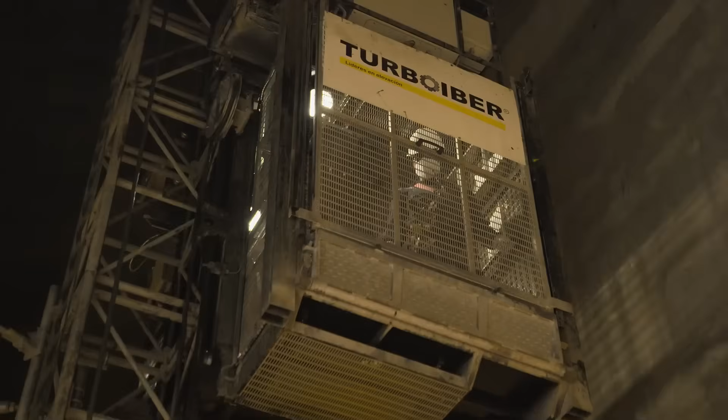Here we are on top of the tower, 220 meters high, and here you see the solar field with 10,600 mirrors, which aim the light of the sun to the top of the receiver, increasing the temperature to 560 degrees Celsius.

A global industrial revolution is underway. We have a technological challenge for our environment, for the well-being of the population of the planet, for civilization.

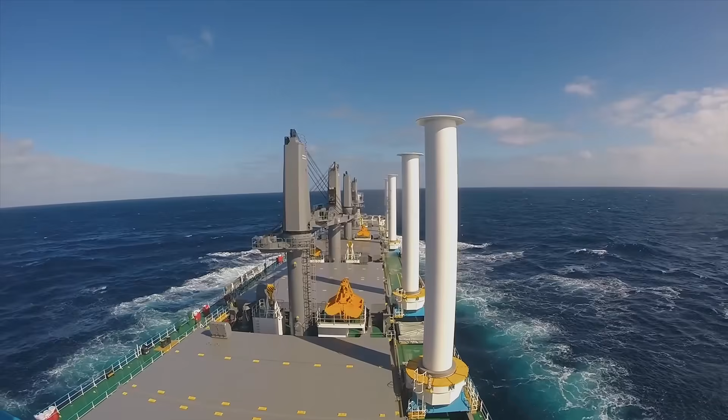Driven by passionate, dedicated individuals intent on shaping a new world. I do it because I look at my kids, and I honestly am convinced this is the way. A cleaner world - there is a way forward other than burning fossil fuels.

A greener world. This wind farm is producing more hours of power into the grid than all wind farms in the UK, and probably in the world.

What we've done in the past is not going to solve these challenges. We need to find new ways, and I think the only way to do that is to bravely step forward and implement technology. Together, they are pushing engineering to its limits to create extraordinary machines that can protect our planet for the future.

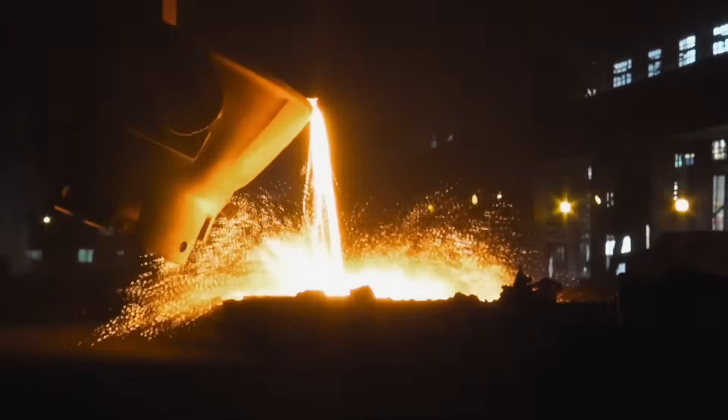We face one of the greatest challenges in the history of humanity: to eliminate the fuels that have driven progress and technology for over a century, while our thirst for energy only grows.

Could the solution lie with an ancient and distant power source? It's without question that in our solar system, the sun is the greatest source of energy, and the better we can take advantage of that, the better it is for us as a civilization.

It's like a nuclear reactor in the sky, and it provides endless power. If we can harvest just fractions of this, it can power all our consumption.

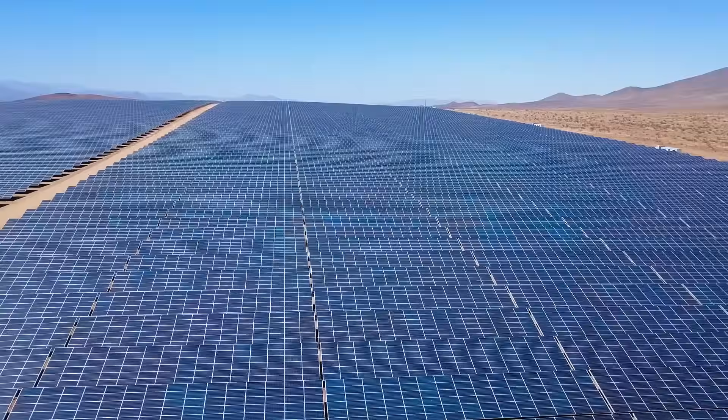Giant strides have been made in capturing the sun's energy, but to replace fossil fuels, solar power needs to step up a gear. We've got a long way to go.

The way I see it, we've only got 2% of the world's energy from solar. So there's a massive opportunity there, and this technology is made for it.

Engineers are racing to capture more of the sun's power, to open vast new expanses for solar panels, and even to make solar electricity available through the night.

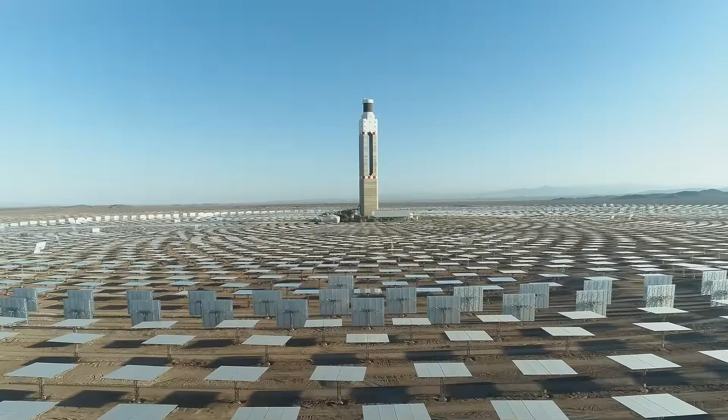This is the full cycle that allows us to keep generating 24 hours using 100% renewable energy, the light from the sun. This is the future.

The vast majority of solar power today is generated by silicon solar panels. These are made of many individual cells. Each cell has two thin layers of crystalline silicon, which have been altered so that one is slightly negatively charged while the other is positive.

The magic happens when light falls on it. Electrons in the silicon atoms absorb the energy and break free. The negatively charged electrons are then drawn toward the positive layer. Once connected to a circuit, this flow of electrons becomes electricity.

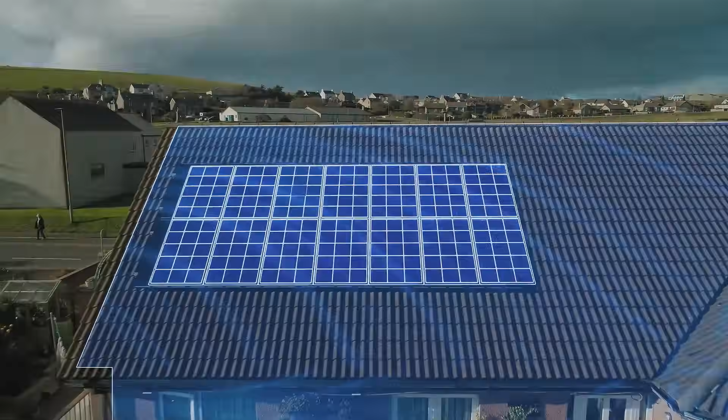Solar panels like this are on rooftops all over the world, producing clean, green electricity to power our homes and charge our gadgets.

But transportation is a much tougher challenge. It's still overwhelmingly powered by fossil fuels.

A tech startup in Holland has gone right back to the drawing board, inventing a new car from first principles that could revolutionize personal travel.

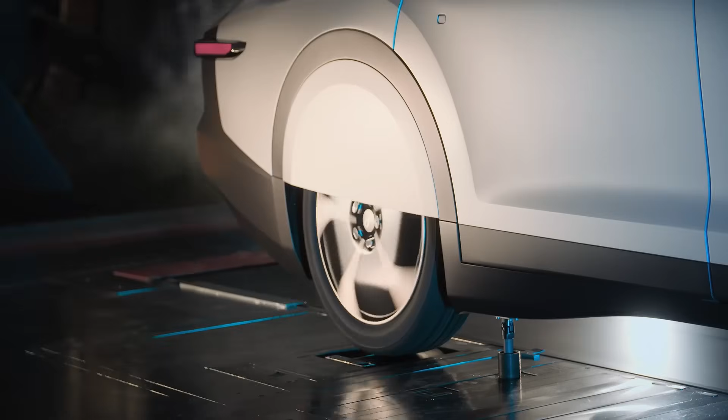Their goal is to prevent billions of people buying gas-powered cars by offering them a vehicle that charges itself for free. Everybody said we couldn't do it, and that's what makes it interesting. I think that's actually one of the things that motivates us, that it seems like an impossible challenge.

And actually, if we look back at the beginning, it all started with the World Solar Challenge.

Their story began at a race across Australia. Every two years, a fleet of futuristic vehicles can be seen streaking across the desert. This 1,800-mile race is powered by the sun, with cars built by students from around the world.

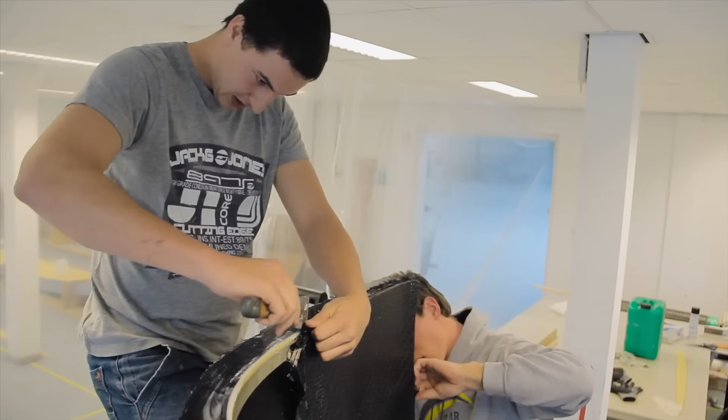In 2012, a Dutch team from Eindhoven, including electrical engineering student Arjo van der Ham, decided to enter for the first time. I think most people were there for the adventure and for actually building something with your own hands during your studies, seeing it work, and then trying to win the race in Australia.

In previous years, all entries had been one-seaters, built purely for speed. But that year, the team decided to enter a new category that awarded extra points for comfort and practicality. The idea was to encourage the development of a commercially viable solar-powered car.

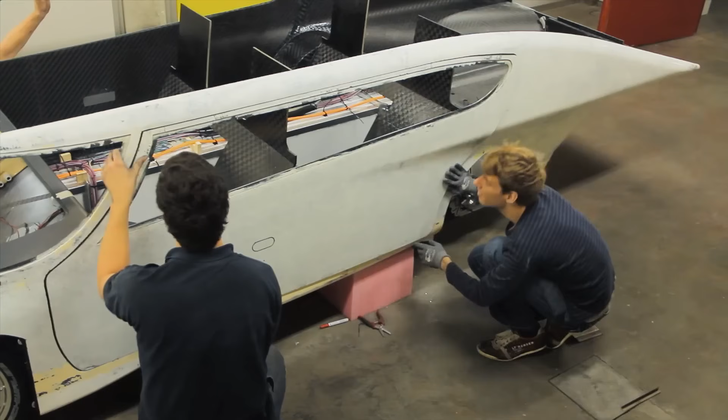We said, okay, let's build a four-seater car. And that became Stella, the world's first solar-powered family car. It had a flat roof, especially for the efficiency of the solar panels. It was very aerodynamic, very lightweight, made almost completely out of carbon fiber.

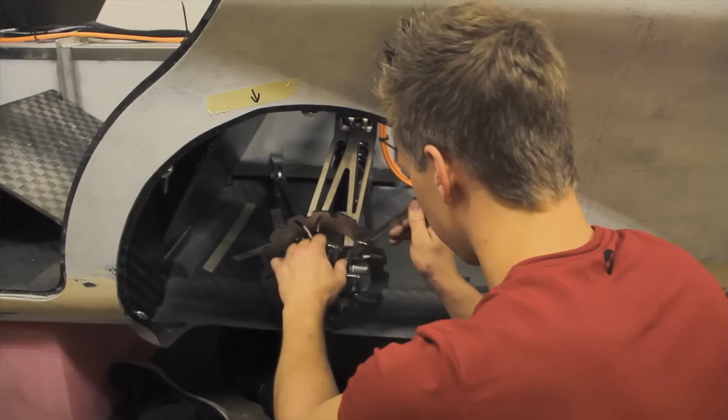The team had just over a year to fully design and build a radical new solar car that could also be a practical family vehicle for everyday use. Stella, they hoped, would be the blueprint for the car of the future.

People would be sleeping actually at the university, waking up, build a solar car, go back to sleep for 6 hours, wake up and go build again. So this was really an intense period for most of the people in the team.

On the 6th of October 2013, the only family-sized car in the race crossed the starting line in Darwin, Australia.

For the next 6 days, Stella would be racing through the desert, powered by the sun, albeit accompanied by gas-powered support vehicles. During the race we had the solar car, and in front of that a small van called the strategy van, packed with computers. We had two guys, me and my buddy, modeling and calculating exactly how fast we should drive the solar car so that at the end of the day our battery is exactly empty.

Everyone expected the comfortable four-seater to be much slower than the others. But by day 3, she'd hit 75 miles per hour, so fast the team bus couldn't keep up.

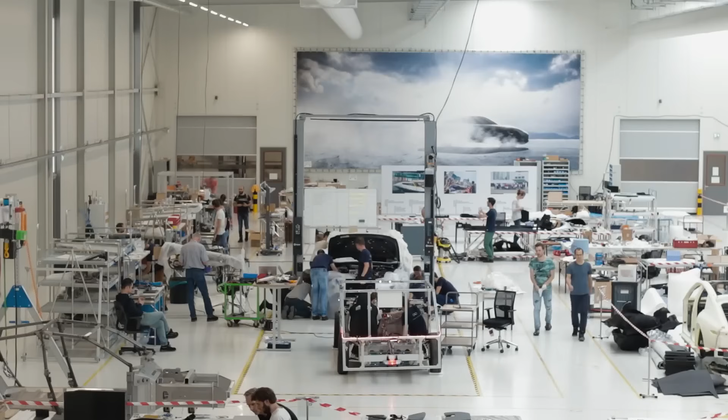Arjo and four other team members decided to make the dream a reality and launched Lightyear to make solar-powered cars for the public. In one year, the entire fleet of cars throughout the world will drive one light year worth of kilometers. The mission of the company is to get that to one light year of sustainable kilometers by 2035.

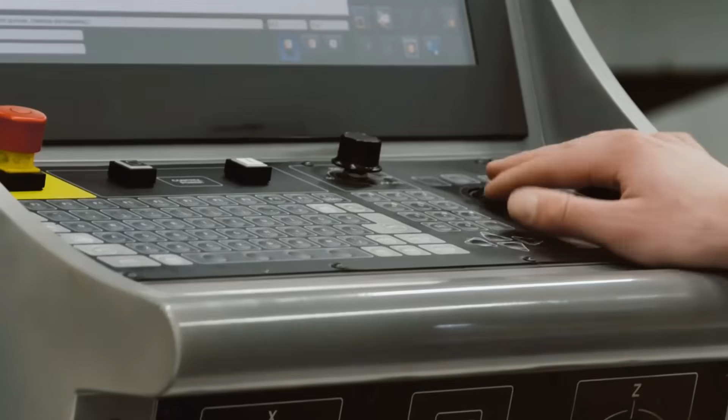To achieve their mission, they set about turning Stella's outlandish design into something more attractive to consumers, while still keeping the radical approach. We came up with our own scoring formula for what would make this car better. The key metric we optimized the Lightyear One for is the amount of miles you can drive each year on the sun—the amount of miles you can drive for free.

That also guided all the decisions. So if you have to decide whether the car should be a bit wider to accommodate more solar panels, or whether it should be a bit smaller to make it more aerodynamic, you calculate how many solar kilometers option one would give and how many solar kilometers option two would give, and then make your decision. This is what guided the development of the Lightyear One.

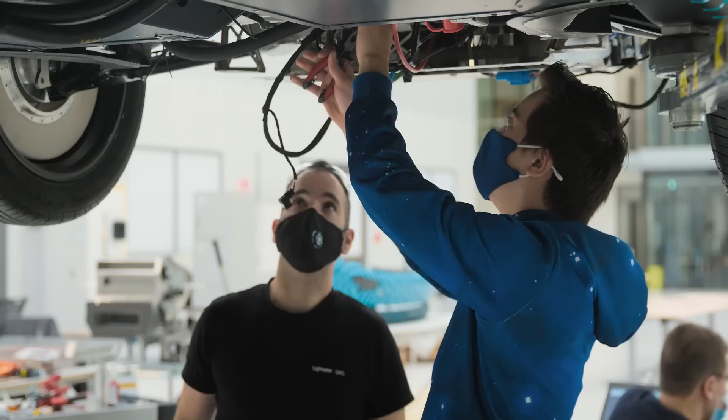As Chief Technical Officer, Arjo has overseen the design of the solar panels. At their workshop in the Netherlands, Lightyear are fixing them in place. With panels on the roof and the bonnet, they cover 54 square feet in total.

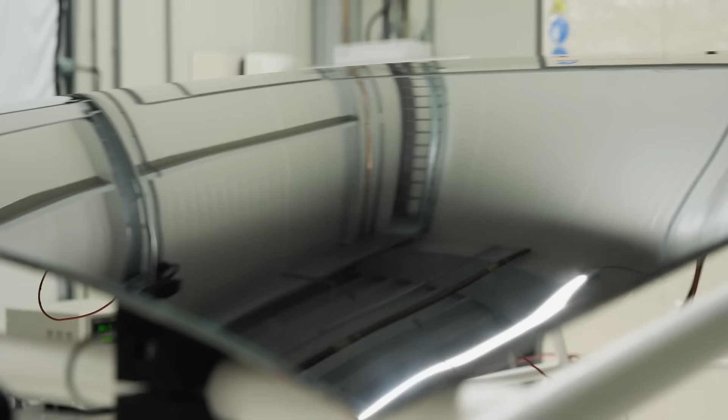Although they work in the same way as a standard panel, Arjo has altered the structure to maximize the power. A special technique can reveal the design. We can actually show the structure of the panels and any defects they will have using an EL test. With an EL test, you use the solar panel in reverse. Normally the solar panel turns sunlight into electricity, but if you do it the other way around and provide electricity to the panel, it will work as a light source, lighting up in the infrared spectrum.

Now we make it dark in the room, so we turn off the lights. We take a picture with the camera that's modified to actually show up the IR light, and then we can see the groups lighting up. You see all of the cells lighting up, but there's a couple of exceptions. This is actually an old panel that we used already for a lot of tests and abused quite a bit, so that's also the places where the solar cells themselves don't work anymore.

Like an X-ray, as well as showing what's broken, the image reveals the inner structure. To increase the power output of the solar panel, we've done lots of small tricks, like putting all the solar cells pretty close to the edge. We've cut them to a smaller size, and that way we can place them closer together. Lightyear claim these are the most efficient solar panels on any car, with the improvements gaining them 20% more power.

As well as squeezing more solar cells into every square foot, Arjo has divided them into groups. To see the benefit of that, you need sunlight. Luckily for countries like Holland, the panels even work on a cloudy day.

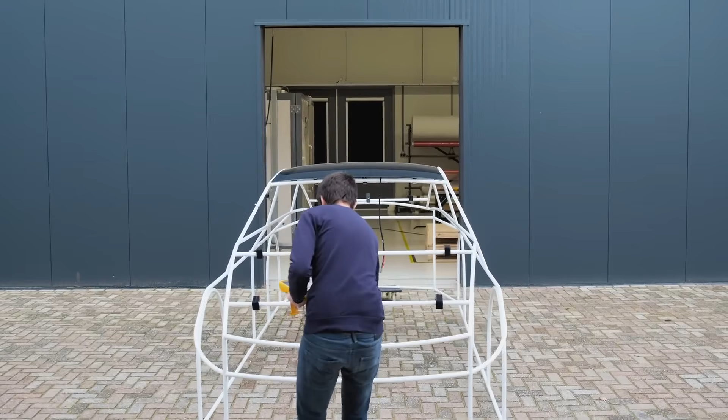First, Ayo is connecting this regular solar panel to a multimeter. This will reveal what impact shadows can have on the power they produce. We've connected the panel to the meter, and if I put a shadow on it, you will see this number dropping—and it actually doesn't matter where I put the shadow, you lose the same amount of energy.

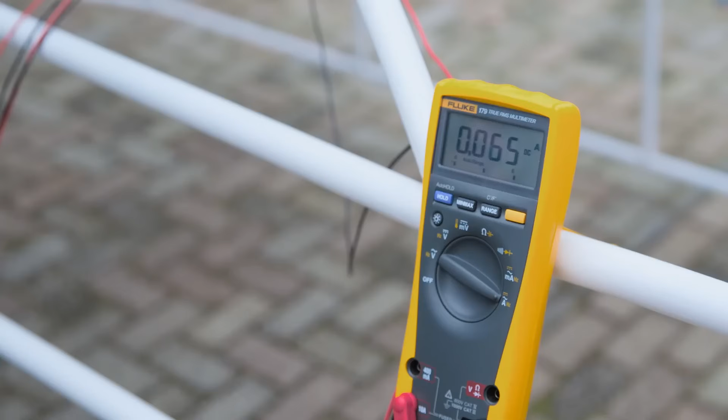If a shadow falls on even one solar cell, the power generated by every other cell drops by the same amount, even if they're in sunlight, because they're all connected. So the whole panel becomes much less efficient. This doesn't matter much for panels on rooftops that rarely have shadows fall on them, but cars regularly drive under trees or past buildings.

On this panel, we've actually divided the panel into 11 very small panels. These 11 very small panels allow us, if one of them is in the shade—one cell—to only shut down one small group of the panel and not the entire panel. We can actually demonstrate this. If I go over it with this board, then I create a shadow on the front, and then only the first meter will show that it actually drops, while the other meters still show the same value.

If I move it along, the value on the first meter actually comes back, and it drops on the second meter. If I move even further along, the same thing happens on the third meter. So as I go over the different groups, I will only shut down the performance of that group and not of the entire roof, which you would see on a regular panel.

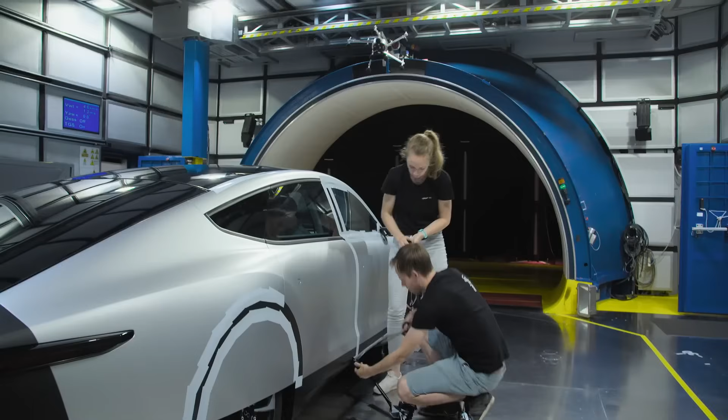As if reinventing the solar panel wasn't enough, the Lightyear team have an even bigger engineering goal: making the car one of the most efficient ever produced. The Lightyear One is designed to maximize the amount of miles you can drive each year on the sun. And if you break that down, the biggest factor is aerodynamics, so making the car more aerodynamic is where you can save the most on energy consumption.

Most of the design process happens using computer simulations. But now the team must prove how streamlined the car really is.

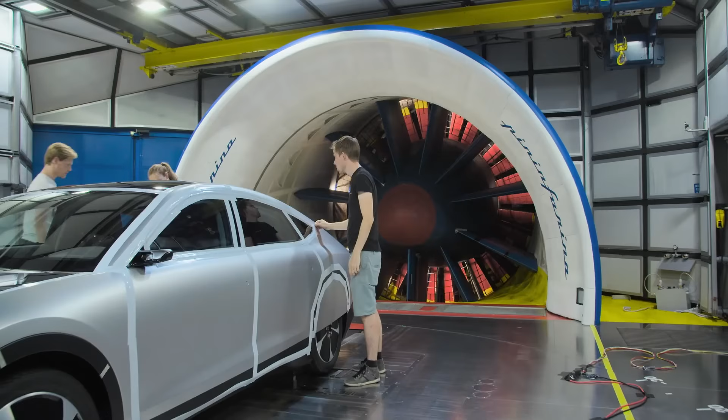Annemiek Koers is responsible for Lightyear One's aerodynamics. We are currently in the wind tunnel with the prototype of Lightyear One to test how it performs at different speeds. So we test the airflow over the car, how much drag it produces, and what effect that has on the range of the car.

The tests will reveal the drag coefficient, a number that tells you how much wind resistance the car has. The target is to get down to about 0.2, which would equal the most streamlined production car ever made. With such low drag, it could drive much further with the precious solar energy it collects.

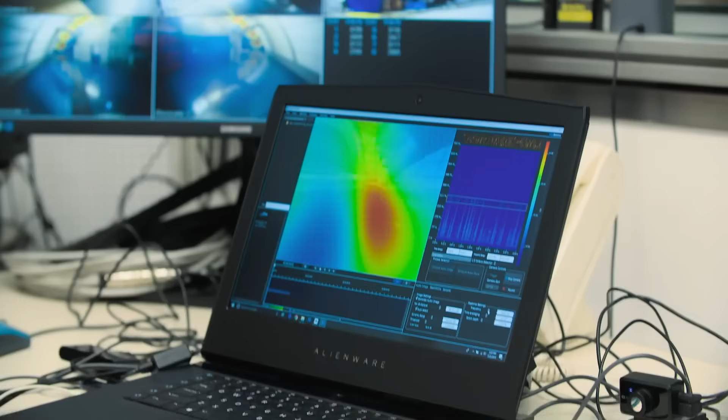But compared to a regular car, the team face an extra challenge. As well as being streamlined, the shape must also fit enough panels. The aerodynamics are a bit constrained by the solar roof. It needs to be a quite flat surface on top instead of having very curved surfaces, which would be maybe better for aerodynamics.

But the team have managed to find a profile that boosts both the solar power and efficiency, one that gives a larger area for the panels while also reducing drag. You can see that we have a very shallow slope going to the rear, and the flow can stay attached over that full length. If you have a shorter car, you'll have a steeper slope, and that will detach the flow and create a lot of drag.

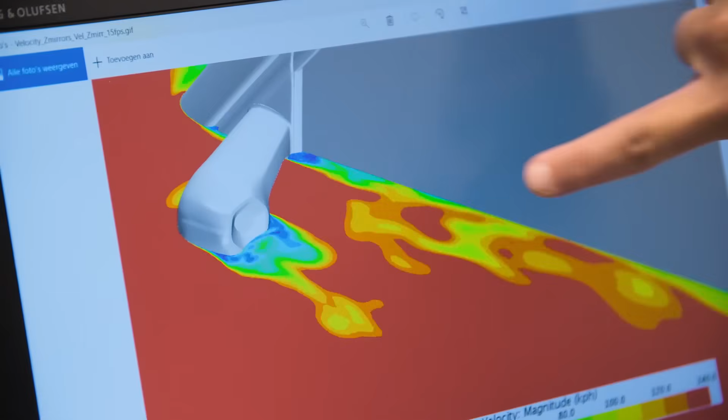The team analyzed and modified every inch of the car, replacing bulky wing mirrors with streamlined cameras and fixing covers over the back wheels.

Eventually, the team get the drag coefficient down even further than they'd hoped, below 0.2. So we can claim to be the most efficient production car by the time we get to production, but that's of course the first step.

This world-beating efficiency means the solar energy can go much further, even in cool, cloudy countries. The solar panel will actually give you enough energy to drive somewhere around 8,000 kilometers per year in the Netherlands. It doesn't sound like that much, right? But the average car in the Netherlands actually only drives 11,000.

For California, they drive much more, but there's also much more sunlight, so you again get around 70% of your annual energy need from the solar panel. For the other 30%, the Lightyear One can be plugged in and charged like a regular electric car.

For now, to pre-order one will set you back well over $100,000. But it could also save thousands at the pump. Towards the future, we will be developing an affordable version of the Lightyear One, and we see energy efficiency as the key to the price in the longer term.

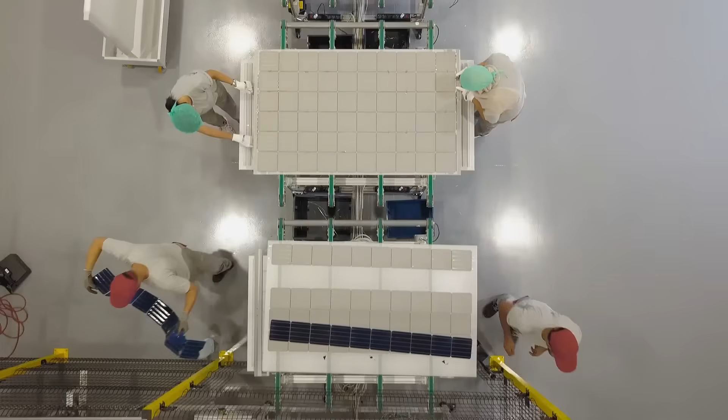But while solar cars may still have a premium price tag, the cost of standard solar panels has already plummeted. The main mineral used to make solar panels, quartz, is abundant and cheap. And by mass manufacturing in large factories with automated production lines, they also cost less to make.

Solar power now is the most affordable source of power. It's just a matter of capturing this energy. And solar power now beats coal-fired power and diesel generators. Now hundreds of millions of solar panels are manufactured every year.

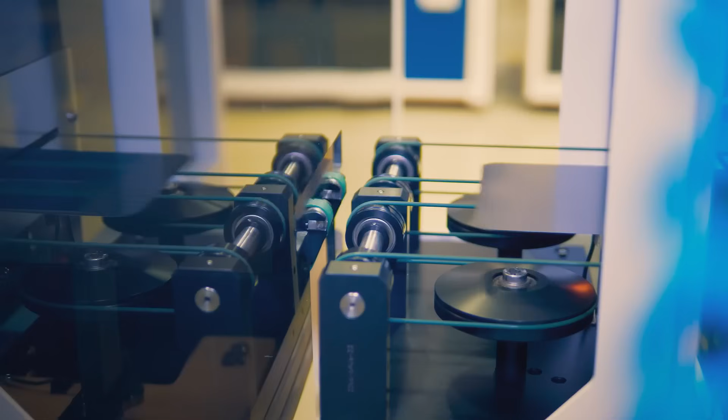With such cheap panels available, solar farms have mushroomed. Many are so large, they're visible from space. Some generate over 2 gigawatts of electricity, enough to charge 400 million phones at the same time. And yet solar power still produces only 2% of the world's electricity.

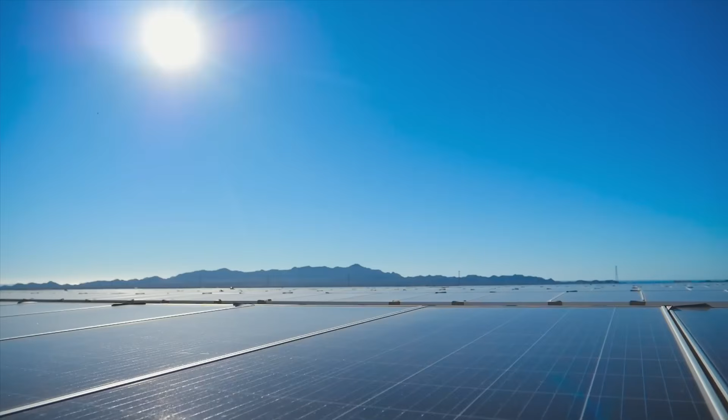That's because although panels are cheap, they need the right kind of location. So one of the challenges, and this is now starting to happen with the very high number of solar panels, is we are searching for new places to put them. And it's a quest to find these areas in good positions.

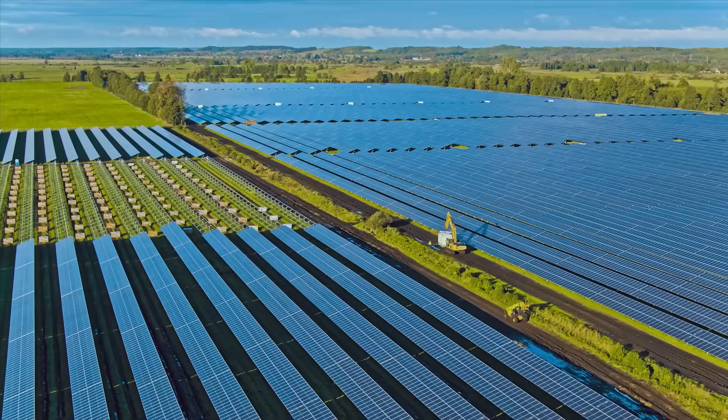As solar farms get bigger, they start to compete with other uses for the land, such as recreation, farming, forests, and other wildlife habitats. It's questionable whether to set aside big surfaces for solar farms, and it's becoming more and more difficult to find good spots for large solar plants.

To solve this conundrum, an entirely different approach is starting to make waves. Børge Bjørneklett is the founder of Ocean Sun, a company making platforms for solar panels that float. Børge realized that there are water bodies all over the world with readily available sunlit surfaces.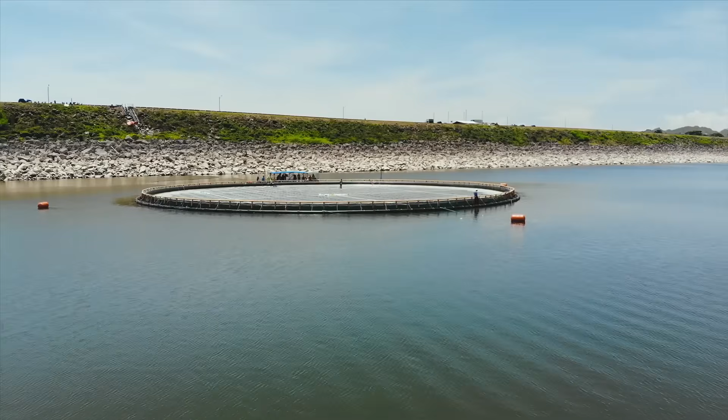Many, like the Magat Reservoir in the Philippines, are next to hydropower dams, which has a big benefit. One very nice thing about combining floating solar power and hydroelectric power is the very short distance from producing solar power to delivering it out to the grid, because the infrastructure is already in place at the power station.

The solar panels generate electricity when it's sunny, while the dam makes power when it rains. It has the flexibility over the seasons—for the rainy season and the dry season, you can make a more steady power production. So this combination is a fantastic application.

Other companies are also targeting lakes and reservoirs. But Børge has set his sights on a much bigger body of water, the sea.

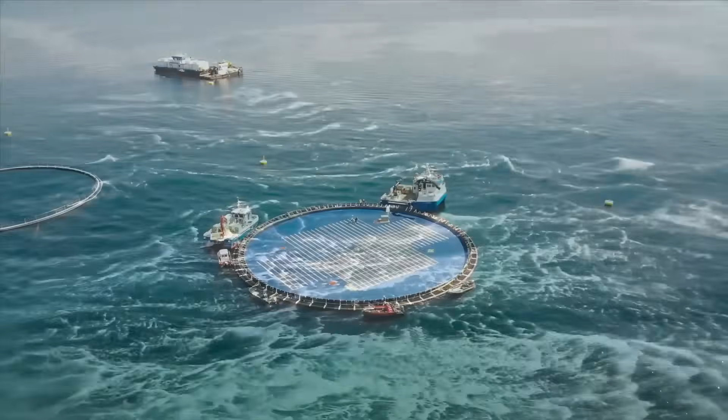The main obstacle is the ocean waves. The challenge is very much to create a protective environment for these solar panels, and also to cope with waves and strong winds that can occur on water surfaces.

Ocean Sun tested their design off Norway's coast. The most critical piece of engineering that protects the panels is also the simplest: the thin polyethylene membrane that forms the surface.

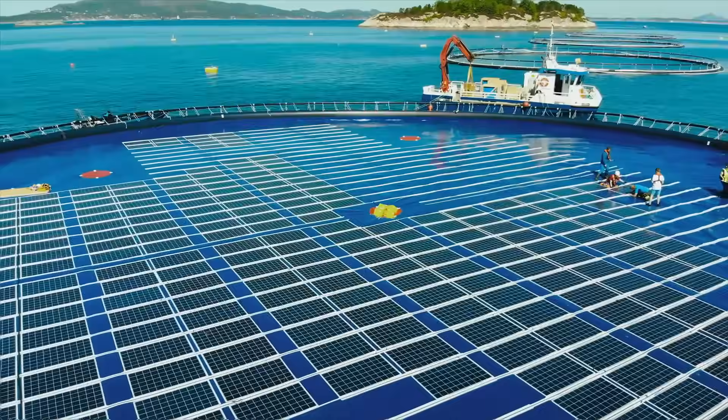This is the fabric of our system, which we place the solar panels on top of. As you can see, it's less than 1 millimeter thick. It interacts with the surface tension of the water to create two curious and powerful effects. Firstly, it boosts the strength of the material.

This fantastic effect that this layer has when we put it on top—it came to us as a big surprise that you could actually walk around on the water surface through this very thin fabric.

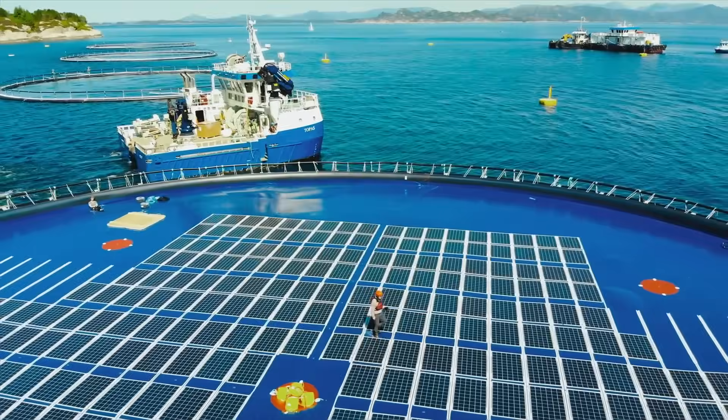And secondly, Børge discovered that the membrane changes how water behaves. It has a dampening effect on the motion of the waves, and it serves as an ideal surface for placing solar power on top of it.

In January 2019, the floating system had a chance to prove itself. In the winter, we had a pretty bad storm coming in over Norway. Bridges were closed and the ferries stopped, and we really got to test our system in quite bad conditions.

The floating solar array was hit by high winds and waves. Once the storm had blown over, the panels emerged unscathed and still generating power.

Having proved it can survive harsh ocean conditions, sea-based solar seems perfectly placed for an energy revolution, as nearly half the world's population lives near the coast.

Many big cities, like here in Oslo, have the ocean right on their doorstep. And if we can use the surfaces here for floating solar power, you have a very short transmission to the consumers.

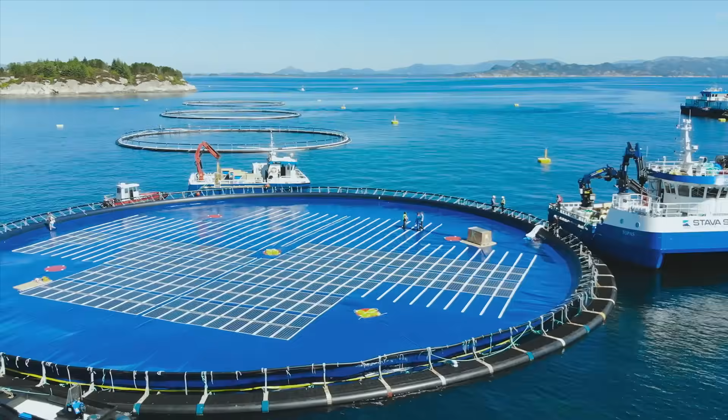Research is underway to minimize any negative impact on marine life. So far, results have shown that floating panels appear to reduce damaging algae blooms.

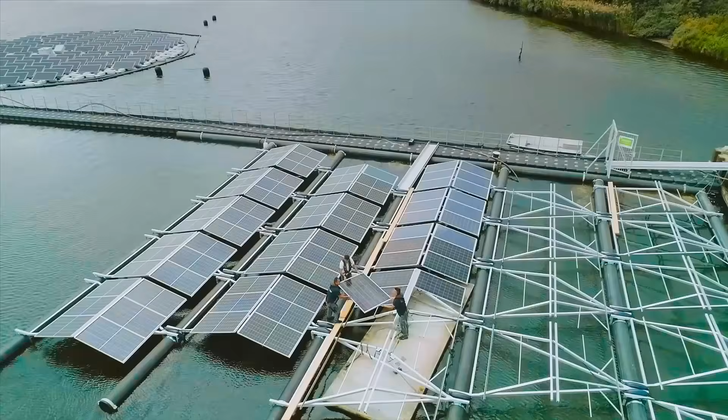With water surfaces now available as well as land, experts estimate that 70,000 new solar panels are being laid every hour, equivalent to 1,000 soccer fields a day. But although solar is already the world's fastest growing energy technology, it could be generating even more power.

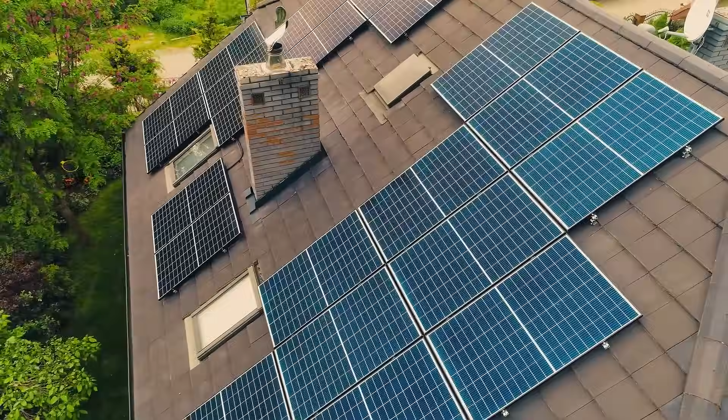Standard solar cells can only convert about one fifth of the energy available in sunlight into electricity. The fundamental problem with your standard solar panel is it captures just 15 to 20% for electricity, and throws the rest away. If that percentage were increased, we could accelerate the transition to clean energy sources.

In Victoria, Australia, a company called RayGen thinks they have found a way to harness more of the sun's power.

Inventor John Lasich came up with part of the solution as a student back in 1975. I was pretty ambitious for a young lad, and I thought if you're going to make perhaps a quarter or even half of the world's energy from solar energy, you have to have something highly efficient and very powerful.

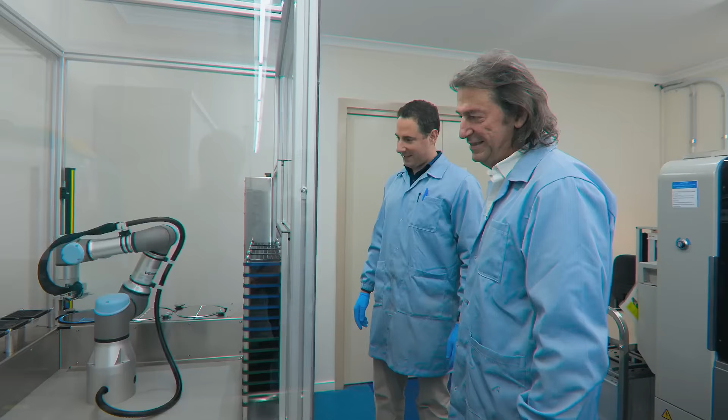To overcome this, John developed a way to protect the cells from overheating, a system he still uses today. Normally we'd expose these to 750 suns of intensity, and what we have to do is have a module that's tough enough to stand a blowtorch - the equivalent of 750 suns of intensity.

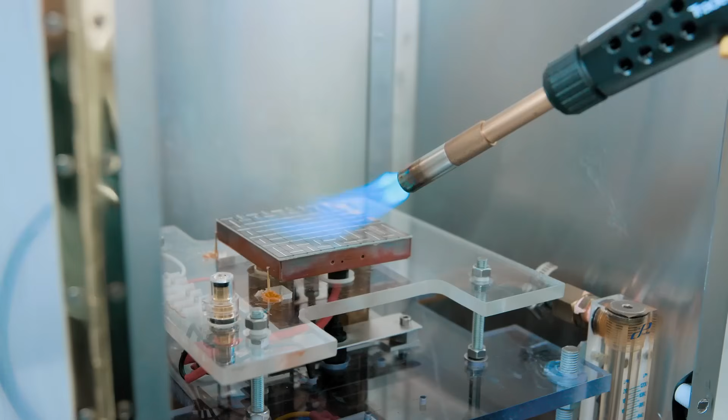The apparatus keeps the solar module cool even when blasted with heat intense enough to melt steel. The secret system involves pumping high-pressure water through the back of the panel. Stone cold - that shows how effective the cooling is.

With the heat problem solved, John scaled up his idea into bigger and bigger dishes. Eventually, he found a system that could focus even more sunlight.

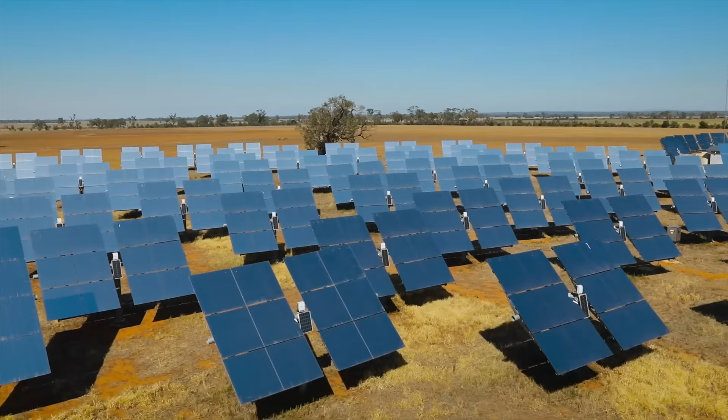At Raygen's pilot plant in Bendigo, Victoria, instead of focusing sunlight with a parabolic dish, they used giant mirrors that reflect sunlight onto solar modules at the top of three tall towers. What we do is put an array of these modules into a large receiver that has a field of mirrors focusing a massive beam of light onto that receiver, where we can produce megawatts of electricity out of that array of modules. The receivers are exposed to 750 times more sunlight than they would be on their own.

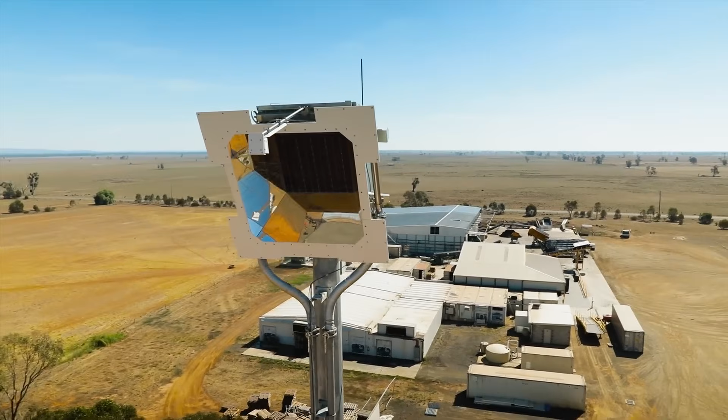This allows another major technological advance. Their solar modules consist not of normal solar cells, which turn around 20% of sunlight into electricity, but of a special type called multi-junction cells, which produce far more power.

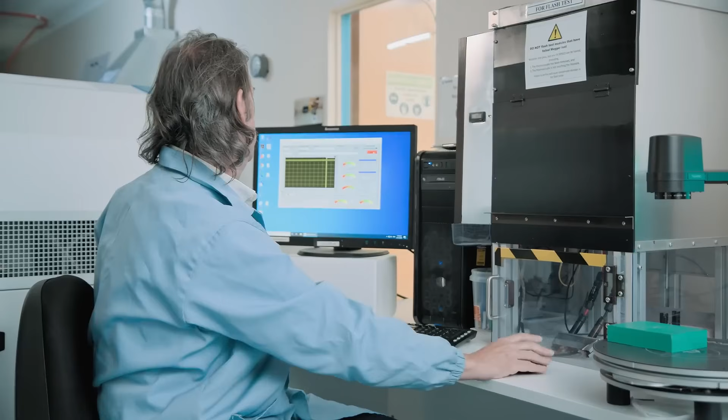This is the flash test we're about to demonstrate, which measures the power and performance of the module. We take a module and place it into the chamber. This machine simulates the sun - we have a flash gun at the top which provides the highly intense light. We simply run the process, and the machine collects the vital information about the module.

So the main indicators: power at 2.27 kilowatts, efficiency of an astonishing 36.9%.

Multi-junction cells can turn around 40% of the sun's energy into electricity, nearly double what conventional ones achieve. This is because sunshine consists of many different wavelengths or colors of light. Standard solar cells have one pair of silicon layers, which can only absorb a small range of those wavelengths - the rest is wasted. Multi-junction cells, on the other hand, have several pairs of layers, each made of different materials that can absorb different wavelengths, so more of the sun's power is harvested.

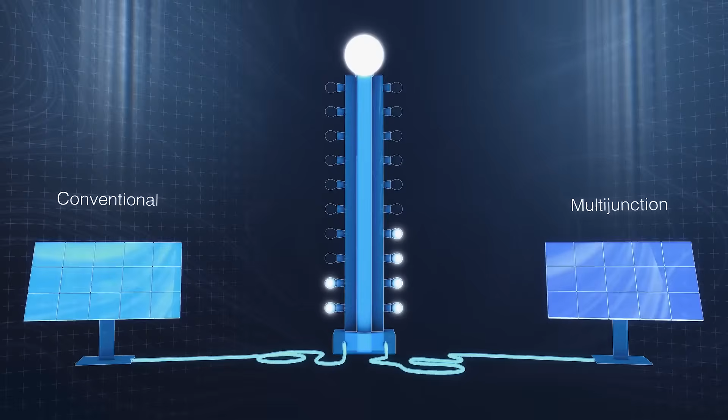Although multi-junction cells are around twice as efficient, their price is also higher, so they're normally only used to power specialist equipment like space satellites. But by concentrating the sunshine, Raygen only needs a small number to capture a vast amount of light. The trick we have is, yes, we pay 100 times more per square centimeter for the cell, but we get 1,500 times more power out of the cell in our system.

When the sun is focused on them, just 2 of these can produce as much electricity as 20 full-size solar panels covering the roof of a large house.

John has plans to scale up his pilot plant to produce gigawatts of power, and they can even share the land it's on with others.

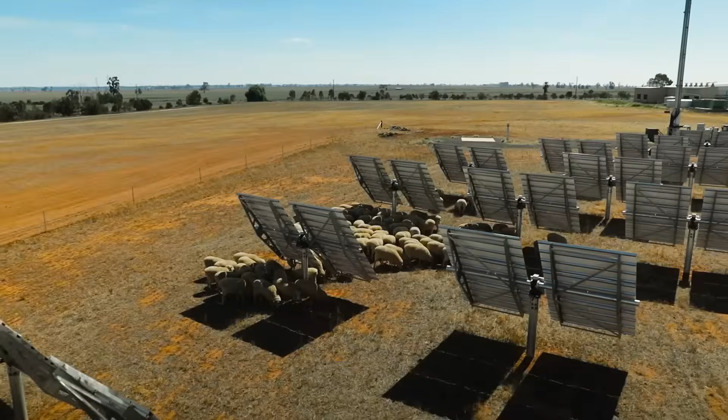What we can do is spread the collectors out a little bit, which makes the system very efficient, but it allows the grass to grow, and we can actually run stock at the same time. So you've got a solar farm and an agricultural farm running on the same land - the beauty of a light footprint.

Raygen hope to disrupt the industry with their radical approach, harnessing even more of the plentiful power we receive from the sun. But despite its success, solar energy currently has a major drawback. Demand for power surges in the evening, just as the sun is setting. Unlike fossil fuel power stations, most solar farms can only produce electricity when the sun is shining.

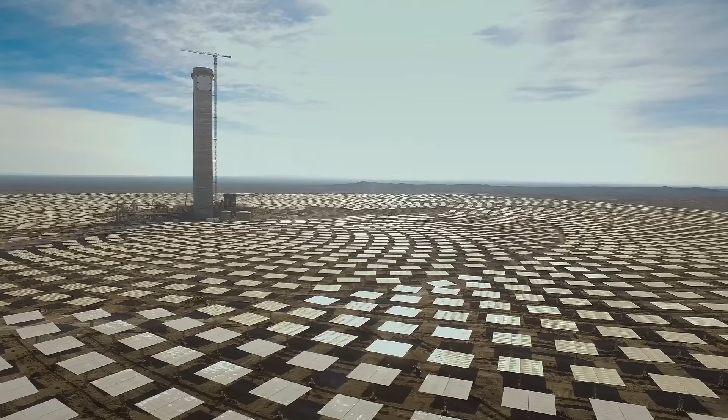In the arid Atacama Desert in Chile, a major new development is aimed at solving the dilemma: Cerro Dominador. Like the Raygen plant in Australia, Cerro Dominador has a tower surrounded by mirrors that will track the sun and collect its energy. But the system works in a fundamentally different way and on a far bigger scale.

Once complete, the tower will rise as high as a 70-story skyscraper. Francisco Vizcaíno is project director of this groundbreaking venture. It is very important to develop projects like this, because if we really want to turn the page on fossil fuels, we need to create green energy, renewable energy that is able to work 24 hours, in the night too.

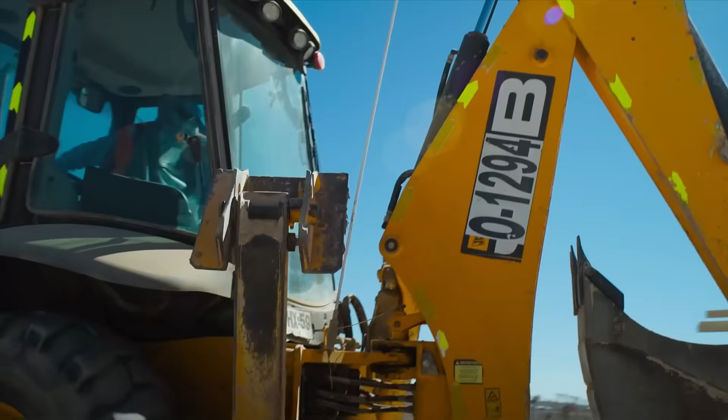One of the most challenging things in constructing this kind of plant in the desert, with this big tower, is the earthquakes. The seismic movements, we need to control by doing a special design, special engineering, and special construction. For the 820-foot high tower to be quake-proof, its foundations must be 24 feet deep.

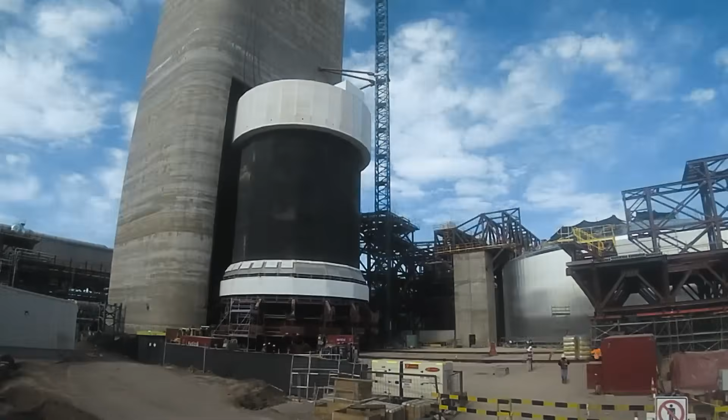Once the main structure was complete, an enormous receiver was assembled for the top. This is where the sunlight will be reflected onto. But the 72-hour-long procedure to lift it into place had never been attempted before. Lifting up this equipment was one of the biggest engineering and construction maneuvers in South America of all time.

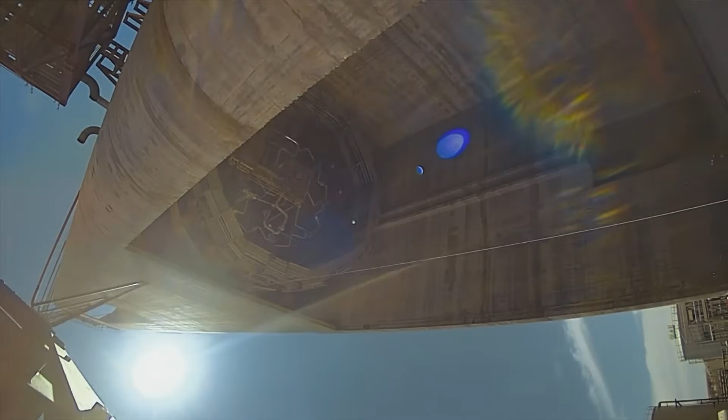It was one of the most tense moments in our life in construction. We have been lifting the receiver, taking care of the earthquakes and the wind, and it was a very, very difficult maneuver. Lifting 3,000 tons of equipment from the ground 250 meters to the top of the tower was challenging, was difficult, but was very nice.

The receiver, which weighs as much as a Navy frigate, was lifted by 16 powerful hydraulic jacks. For safety, it had to be moved no faster than 16 feet per hour. After 3 days, the receiver reached the top and was successfully fixed in place.

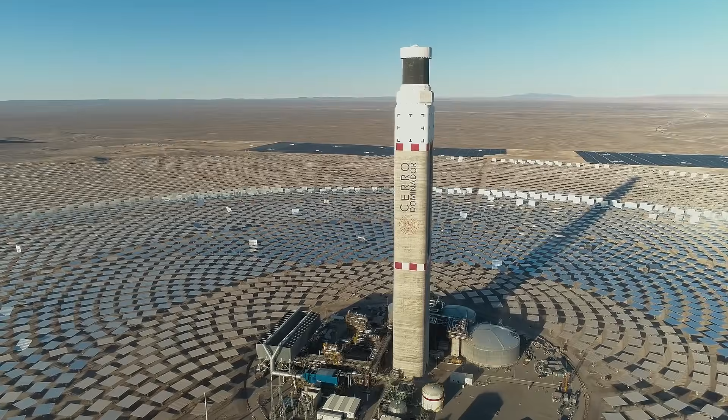Once complete, the tower became the second tallest man-made structure in Chile and the 5th highest on the continent. As well as building the giant tower, the workers have a huge job assembling and calibrating over 10,000 giant mechanical mirrors called heliostats, spread over an area of 1,700 acres. Each one is the size of a helipad and can tilt in any direction.

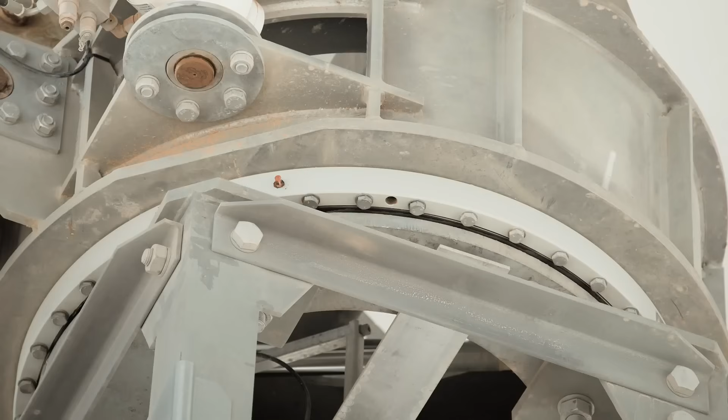If they're even a fraction of a degree out of position, the whole system could fail.

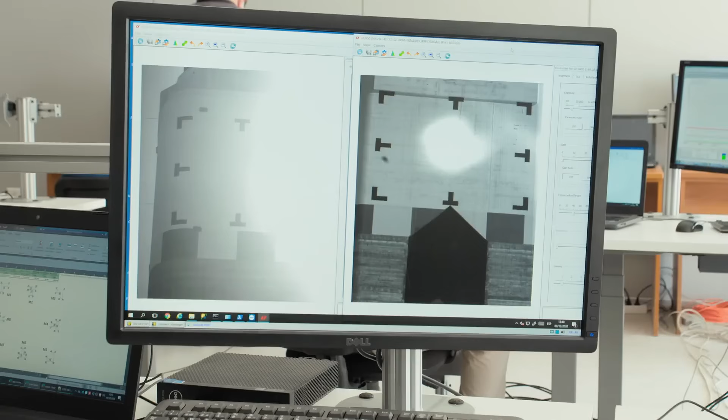Once the light spot has been locked into position, the system will be able to find the black receiver automatically. One down, 10,599 to go.

The best view of the heliostat field is from the top of the central tower. To get there takes a 13-minute ride in an elevator. Here we are on the top of the tower, 220 meters, and here you see all the solar field with the 10,600 mirrors, which will be reflecting the light of the sun to the top of this tower, just where we are right now.

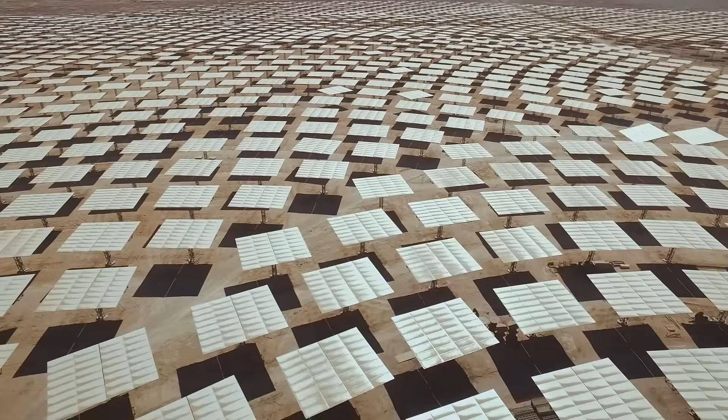It's very, very nice when in the morning they wake up and like sunflowers, they are following the sun, aiming the light of the sun to the top of the receiver.

From here, you can see the big difference between this site and conventional solar power plants. There are no solar panels anywhere. At Cerro Dominador, they will generate electricity a completely different way.

A special liquid made from salt is pumped to the receiver at the top of the tower. Here, the reflected heat from the sun raises the liquid's temperature to a whopping 1040 degrees Fahrenheit, as hot as lava. That molten salt is then pumped back down the tower, where it's used to heat water and make high-pressure steam. That steam drives a turbine and makes electricity.

Cerro Dominador is not the first solar plant to generate electricity this way, but it aims to be one of the first to produce power reliably on demand 24 hours a day.

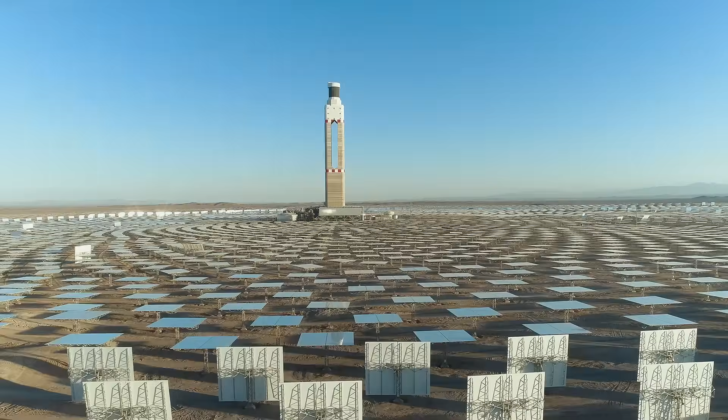Conventional batteries are much too expensive to use on this scale. So to generate electricity through the night, Cerro Dominador has 2 giant storage tanks at the bottom of the tower. Here we have the tanks. The salt today is here, melted. 46,000 tons of salt inside those tanks waiting to be pumped to the top of the tower.

The salt from a nearby mine in northern Chile consists of sodium and potassium nitrates, which have the ideal properties to store heat safely and reliably.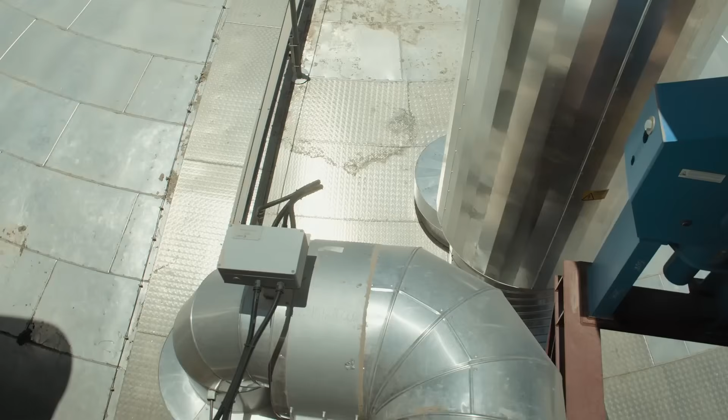Once on site, the salt was melted, then the liquid was stored in a tank. Despite being 600 degrees Fahrenheit, this is known as the cold tank. In the morning, we have all the salt there in the cold tank, 46,000 tons of salt there.

During the day, the salt is being pumped to the top of the receiver, to the top of the tower. In the receiver, we heat the salt, and we start to fill the hot tank. So during the day, the cold tank is getting empty, and the hot tank is getting full. In the hot tank, the salt is stored at 1040 degrees Fahrenheit. The tanks are so well insulated that the temperature only drops 1 degree per day.

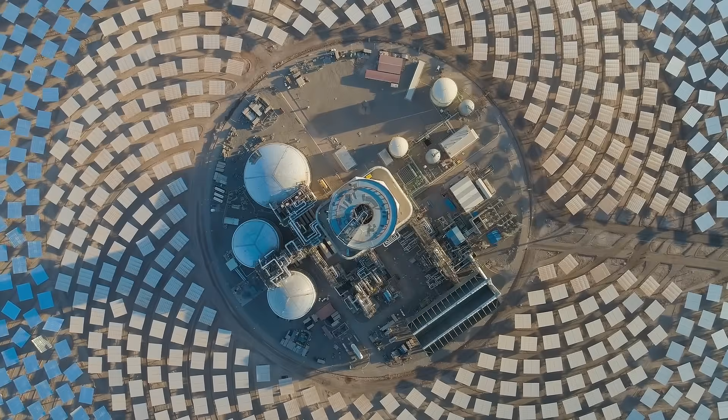During the full night, we are using that salt to generate steam, and at the end of the night, again, we have the cold tank completely full of salt. This is the full battery cycle that allows us to keep generating 24 hours using 100% renewable energy, the light from the sun.

Solar tower technology with molten salt tanks can generate solar electricity on demand 24/7. But they only work efficiently in countries with intense sunlight near the equator. If power from the sun is to truly replace fossil fuels, we need solar-generated electricity available day and night, everywhere.

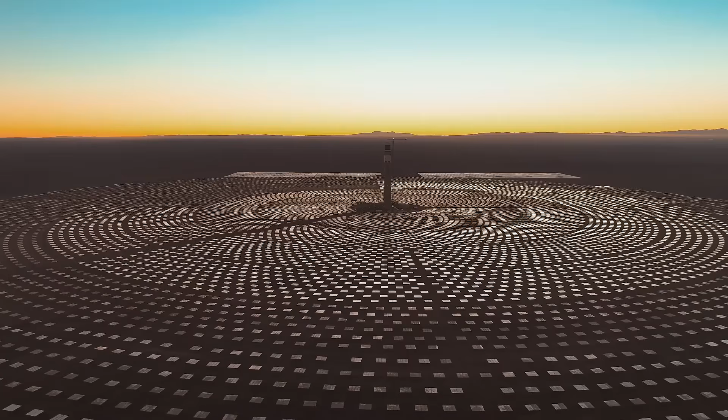A team at the US Naval Research Laboratory is working on a way to supply solar power to any place, any time. It's called space solar, and it sounds like something from a science fiction movie.

The idea of space solar is that instead of collecting sunlight on the ground using a solar panel the way we usually do it, we take that solar panel instead and put it in space, and then send it to where you need it on Earth.

We kind of take it for granted now that we can go anywhere on this planet, take out your phone, and it tells you where you are. We can do that because we have a system of satellites, the Global Positioning Satellites, which was also created here at the Naval Research Laboratory.

And we're talking about doing the same thing for energy. Imagine if you could just go anywhere on Earth and you wouldn't have to worry about charging your batteries or where you're going to plug in, and just have energy no matter where you are.

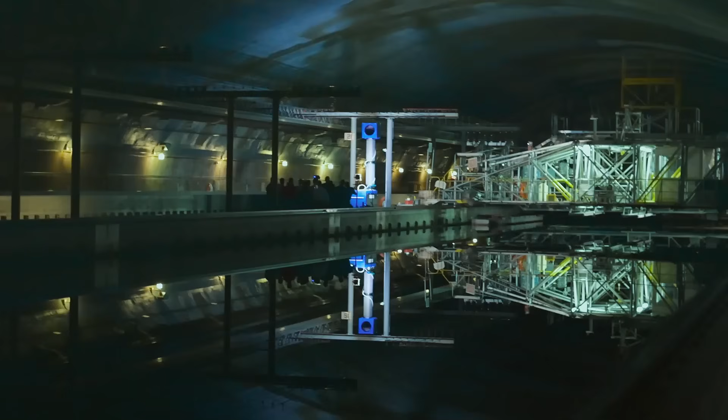Dr. Paul Jaffe is the lead engineer on the project. In 2019, his team set out to demonstrate a vital part of the technology at one of the world's biggest marine testing facilities: a prototype system to transfer power over long distances without using wires.

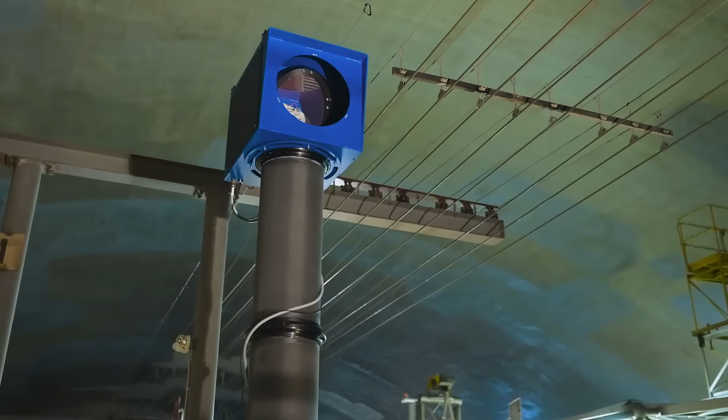Instead, the power will be sent as a laser beam. So we have here today a 2 kilowatt laser transmitter, and we have a receiver that is made out of photovoltaics, similar to what you would find in a solar panel. This is really a remarkable capability that unlocks all kinds of amazing possibilities.

So the power beam itself is invisible and completely silent. The way that we can help show where it is is with this $20,000 infrared imager. You can see the transmitter sending the beam over 325 meters to the receiver at this end of the basin, which converts that back to electricity for us to use. You'll notice, though, that you cannot see the beam if you just look without an imager.

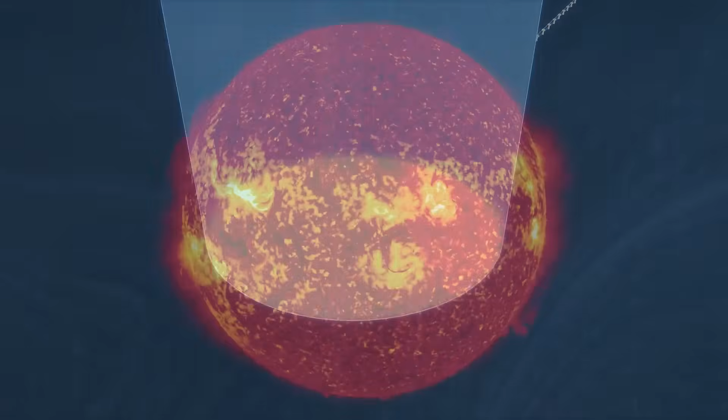The aim is to ultimately use a scaled-up version to send beams of solar energy collected in space back to Earth. The transmitter would be on a satellite, with the receiver down on Earth's surface. Imagine if we could take the boundless sunlight in space and send it effectively to the ground, to wherever we need it—a refugee camp, a developing country, places that are difficult and expensive to get energy to today. If we could do that effectively, it would be truly revolutionary.

But firing a giant laser beam at Earth from space might naturally cause alarm. So Paul's team have developed a safety mechanism and are testing it out today. The system should detect when something or someone enters the beam and instantly shut down. This solar circuit breaker means the technology could be used on a much bigger scale in the future.

For now, though, Paul's team are happy to use the beamed electricity to make a simple cup of joe. This demonstration has exceeded our expectations many times over. We are opening people's eyes to the prospect for this revolutionary technology.

As well as creating safe power beams, Paul's team have been working for 10 years on a prototype space solar module called PRAM. Its job is to generate solar power and convert it to a form of energy that could be beamed to Earth. To check that the module would work outside the atmosphere, the team simulated space inside the lab. Liquid nitrogen matched the extreme cold, a vacuum chamber removed the air, while xenon lamps mimicked the intense sunlight.

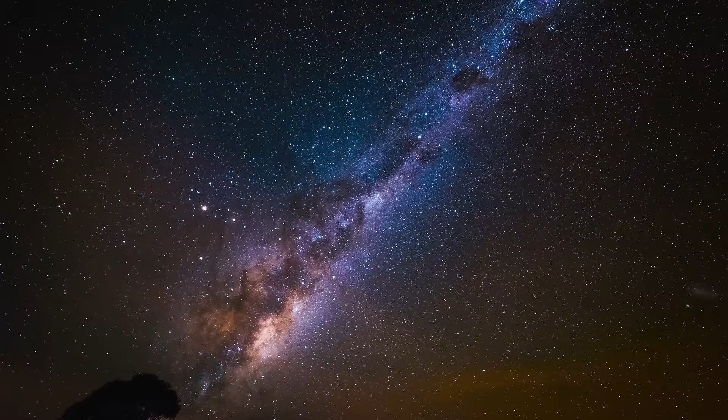But although space conditions are harsh, there's more energy available to harness. In space, it's always daytime and it's always brighter than anywhere on Earth. So you not only have 24-hour-a-day sunlight, but it is also brighter—you never have to worry about clouds, nighttime, rain, or anything that would interfere with the collection of solar energy. The next step was space itself.

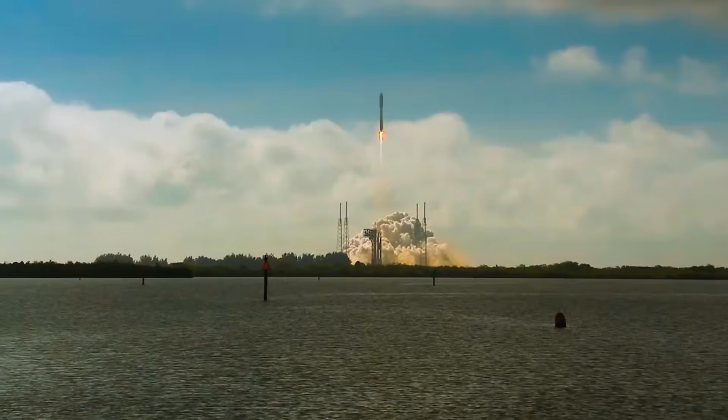T-minus 3, 2, 1, and liftoff. After more than a decade's work, in May 2020, the module launched aboard the US Air Force X-37B orbital test vehicle.

It almost felt surreal to think of how it started as just a kind of crazy idea that we proposed, got the funding, resources and support to build, and finally made it to the point where we're actually launching it into space—and it's operating on orbit and sending us data that we're now going to use to continue to push this technology forward.

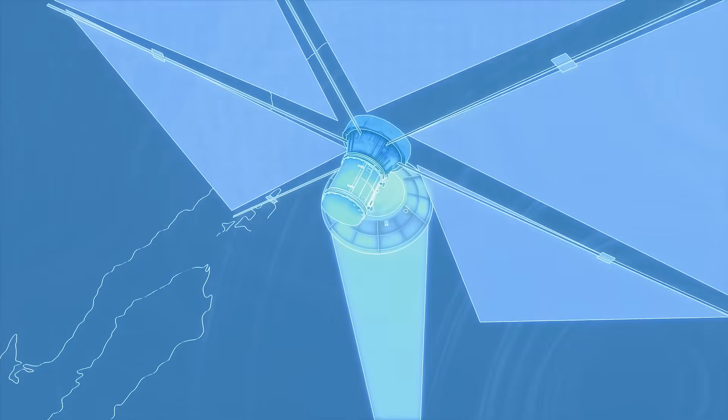Paul's team are laying the groundwork for a potential energy revolution in years to come. In the meantime, other solar technologies are already powering ahead.

Solar towers capable of generating electricity 24 hours a day are appearing in sunny countries around the world, from Israel to South Africa, while advances in technology capture more and more of the sun's energy.

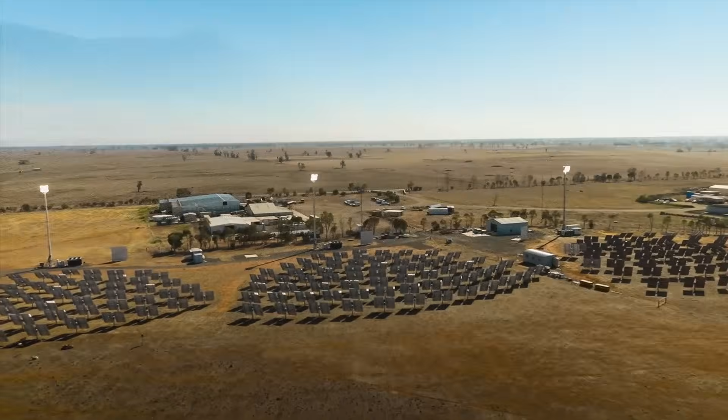In Australia, RayGen plan to start harnessing the heat from their cooling system to produce another critical resource alongside electricity. That byproduct heat can be used to desalinate water very cheaply, producing the two most important resources any community needs: power and water. With power and water, you can do anything.

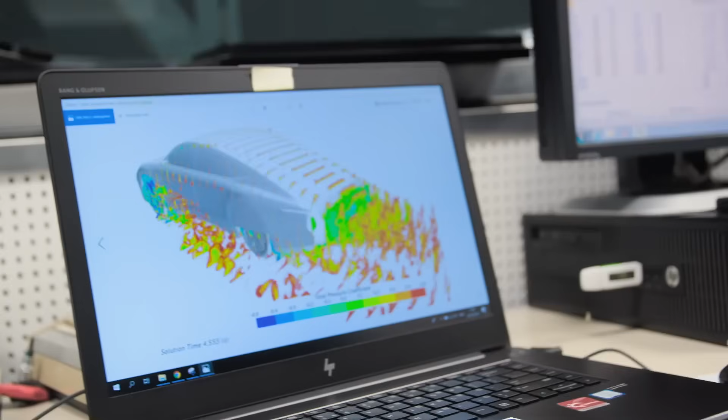Lightyear have plans for a car so cheap to run that billions of drivers would choose solar-powered transportation. That became the mission of the company: clean mobility for everyone. That's what we're working towards, first by making, unfortunately, a rather expensive car to test the technology and show everybody that this is working, and then the next step is to make it available to everyone to fulfill the mission.

And the spread of solar panels from land onto lakes and oceans is opening up an almost limitless opportunity to generate clean electricity from the sun. I'm very optimistic—I think technology can provide the solutions, that we can develop this and make this transition. It's doable and the technology is almost there. When it comes to solar, the future looks bright.